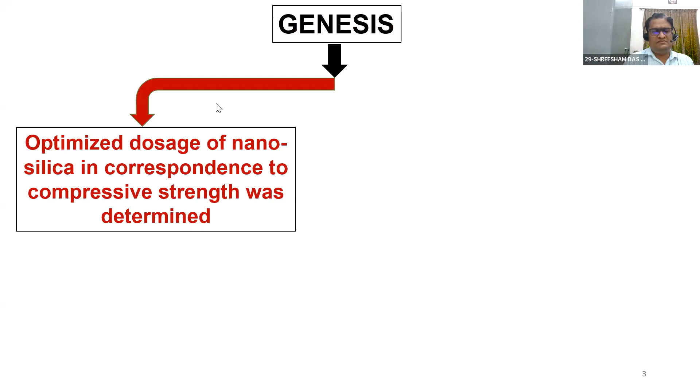And so what is the genesis? The genesis is, you know, the concrete or cementitious system we are looking at at this point of time necessarily has to be a high performing material and a sustainable material. So with this point of view, first we have optimized a nano silica blended cementitious composite that is, you can say, a high performing material as well as a sustainable material.

But in addition to that, we have realized there is a scope to go into transforming the nanosilica admixed cementitious composite into a thermal efficient material. So that is the need of the hour. Particularly if you have experienced last summer, that is 2023 April, May, June, even some of North India is still having that effect. We have really felt the temperature has gone up significantly.

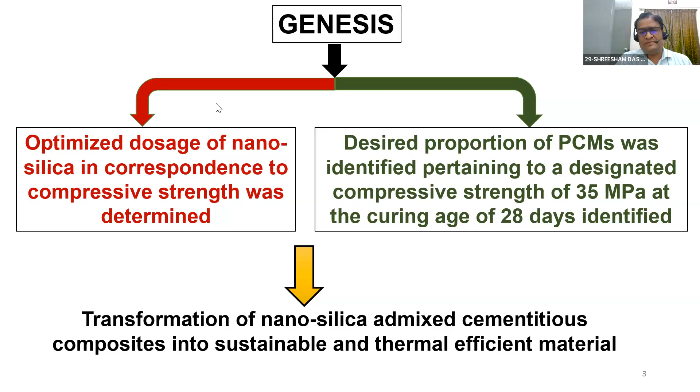So what we have to do now? Well, for all our building materials we are now completely dependent on concrete, the cementitious composites. So the problem here is the concrete or the cementitious composite is very poor performing with respect to thermal efficiency. So that is the reason it is necessary now to move into the development of a material where we can store the thermal energy and make the blended material a thermal efficient material.

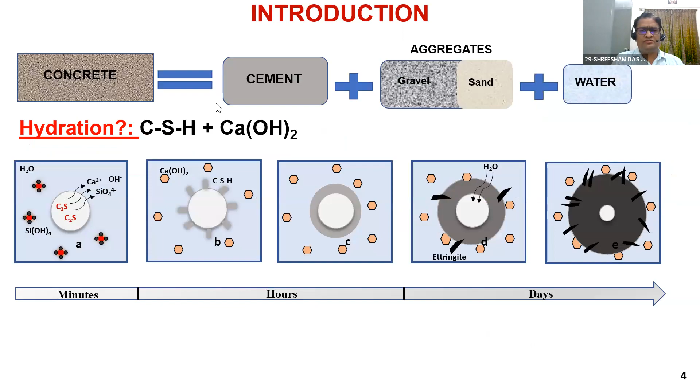So, well, I will go into this. In many of the presentations, many places, I have spoken about what the hydration process is for concrete. So I will skip it, because time is very short, since in many places I have spoken about what hydration is and how. Okay, like a bulk concrete.

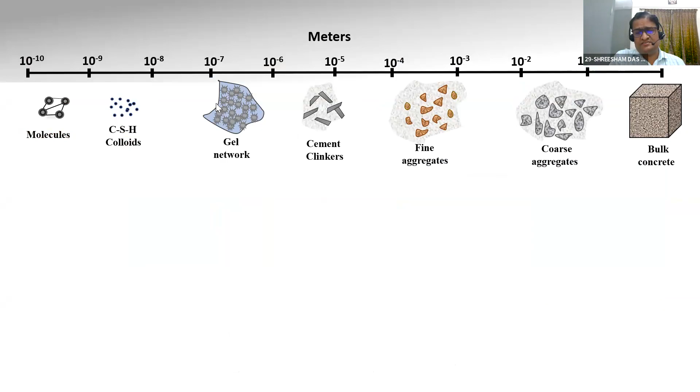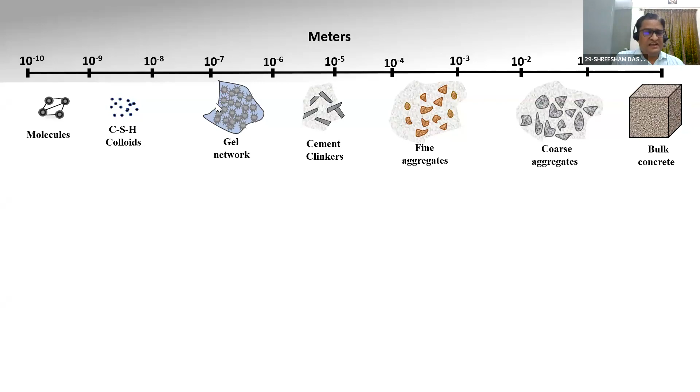Now in this slide you can see the bulk concrete, which is in 10 to the power minus 0, that is a meter scale specimen. We are anticipating the performance in this kind of size specimen, whether it is a beam or a column or a foundation or a slab, whatever it is. But the chemistry lies completely to the left side, that is the CSH colloids, the gel networks, the molecules. So that is the chemistry, and that defines the performance of the bulk concrete.

So, well, I will skip where we have spoken about the molecular dynamics. So this is nothing but the development of a nano engineered concrete, where it is necessary to go ahead with the addition of nanoparticles. So what is this slide with respect to the particle size of the material?

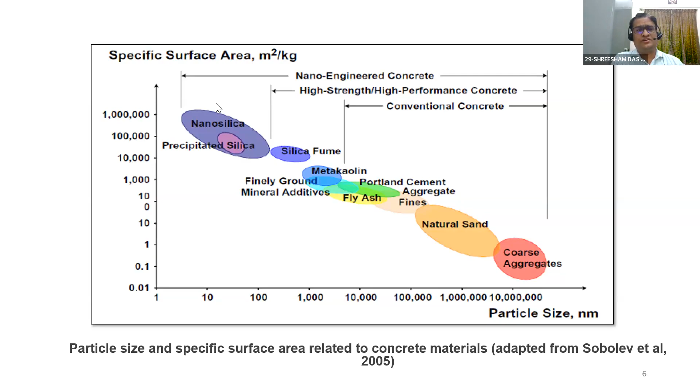The moment you keep on adding smaller and smaller sizes, you are able to produce conventional concrete, then high strength or high performance concrete, and then nano engineered concrete. So what is a nano engineered concrete? Well, it is nothing but nano ingredients with at least one dimension of nanometer in size. That is nano science, or you can say nano engineered concrete, with respect to concrete science. So there are a lot of advantages.

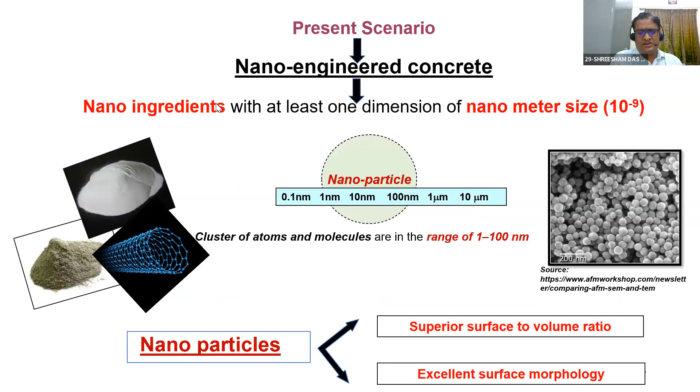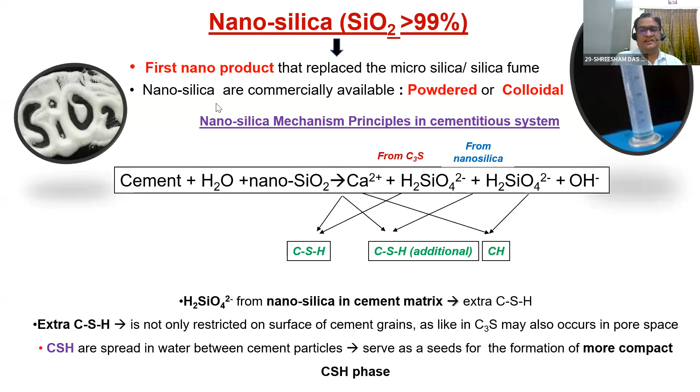In addition to that, nanoparticles are also a highly pozzolanic material. So because of the high pozzolanicity of the system, we get extra calcium silicate hydrates. And that is the way we get very compact and dense hydrated products. And that gives me a long lasting material, or you can say a durable material. So this I will just skip. This is all molecular dynamics.

But what is the challenge here? The challenge is when you deal with nanoscale material, it accelerates the hydration rates and reduces the workability. Smaller particles such as nanosilica also produce shrinkage, that is a large number of microcracks, and accelerated heat of hydration is governed by the curing. So you have to have very good quality control practices. That is necessary when you deal with smaller and smaller size particles. Otherwise, it is going to give you a problem.

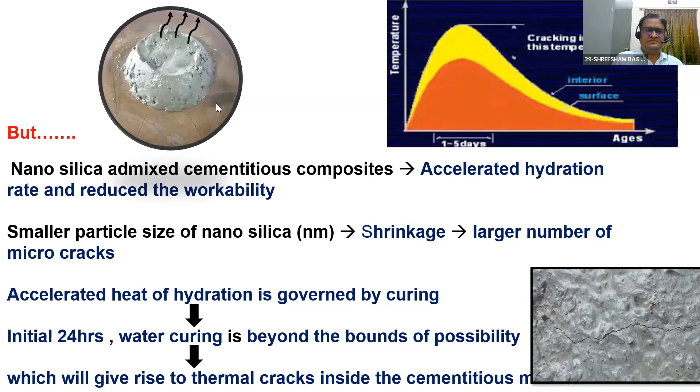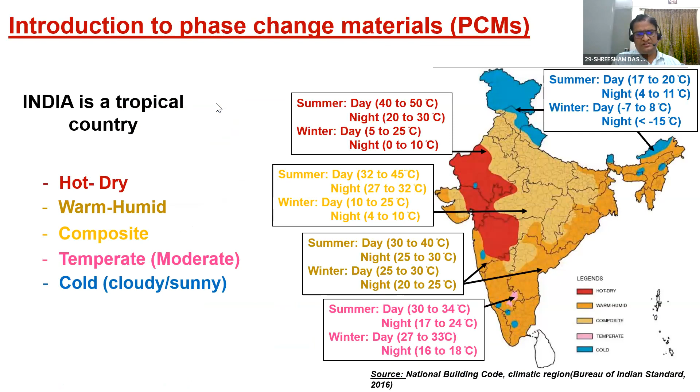So you can see that is what is happening. The moment you lose water, there is no chance except the formation of shrinkage cracks. So India is a very tropical country. We have very challenging climatic conditions. As per the Indian code of practice, we have 5 kinds of climatic zones: hot and dry, warm and humid, composite, moderate, and cold. So 5 climatic conditions, and the variation of the temperature is quite large.

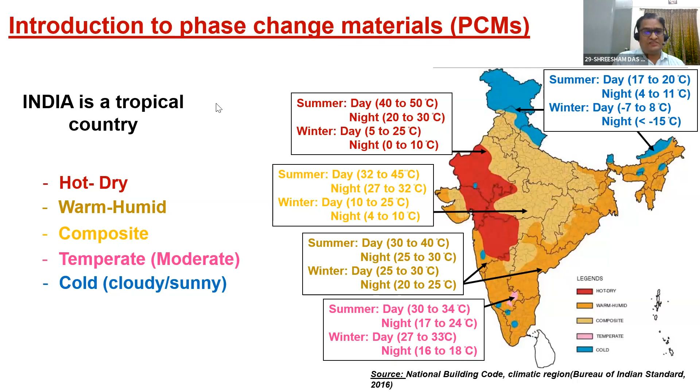In the south particularly, we are having intense rain now; if you go to the north, the rain has still to start. So we have a variety of climates across the country. Now, what are the challenges? The challenge is the summer and the winter. The variation between summer and winter for a few climates is too much. Like in hot and dry climates, summer temperature goes up to 45, 46, sometimes 50 degrees centigrade, and winter temperature comes down to even 0 degrees at night. So that is the variation from summer to winter.

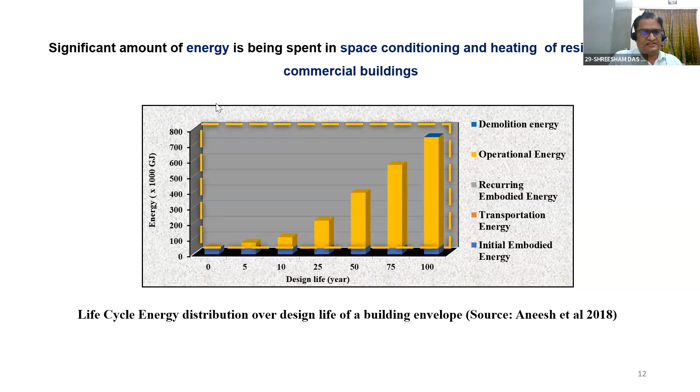So we have done a life cycle energy distribution over the design life of a building envelope, considering a variety of envelopes. We realized the operational energy is the largest consumption of energy in the life cycle of the building. You are spending almost 90 to 95% of the energy in its life cycle as operational energy. So what is the need at this point of time? Well, the need is energy efficient materials. Can we by any means increase the energy efficiency of the materials so that the thermal load can be cut down? That is the best way to conserve energy.

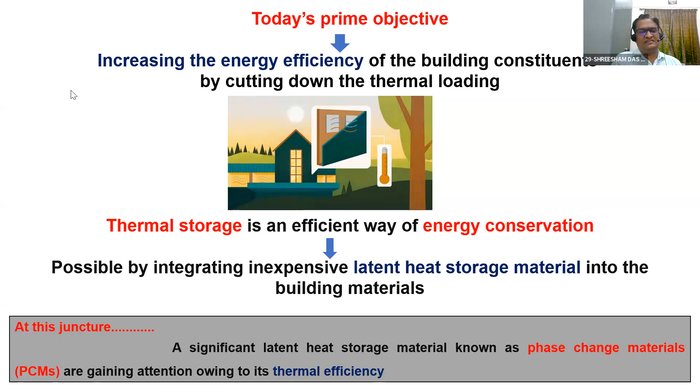So how is it possible? Well, there is a method: integrating inexpensive latent heat storage material into the building materials. At this point of time, latent heat storage materials, known as phase change materials, are gaining a lot of attention owing to their thermal efficiency. So you have to integrate the phase change materials, that is your latent heat storage materials, into the building materials. And that is the way you can make the system more efficient in conserving energy.

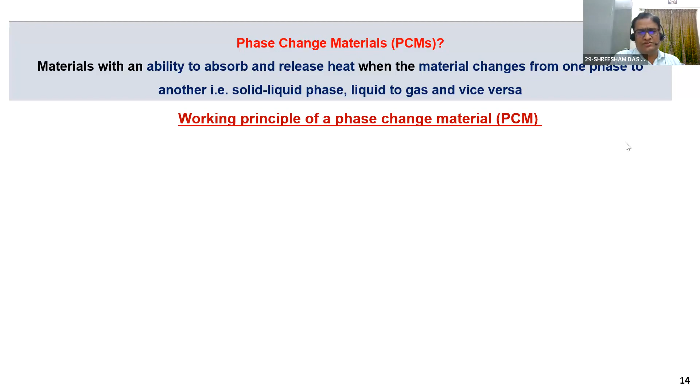So what are phase change materials? Phase change materials are nothing but materials with an ability to absorb and release heat when the material changes from one phase to another, that is solid to liquid phase, liquid to gas, and vice versa.

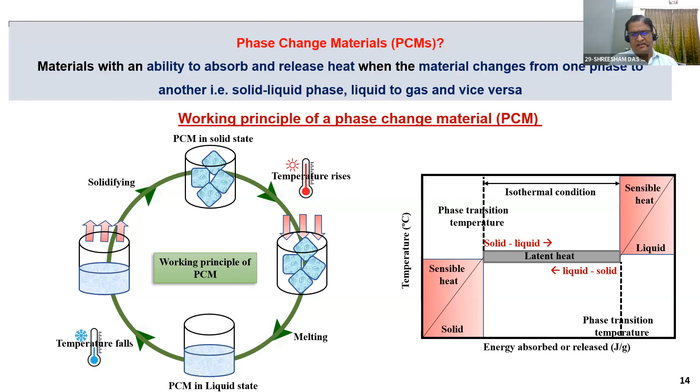So when you integrate the phase change material in concrete particularly, in hot day time, PCM absorbs surplus heat by getting melted, and that is the way it minimizes the load of air conditioning. The principle of heat absorbance is that a liquid takes a lot of time to get heated. The moment the PCM absorbs the heat, it converts into the liquid form, and thereby it will not allow the heat inside the building. So it absorbs all the heating load, and that is the way your air conditioning load is minimized.

Similarly, in the cold day time, or for example in the night if the diurnal variation is too much, the PCM becomes solid and the stored heat is released back. So in a cold day time, you need not switch on the heater, because it will not allow the outside cooling into the building, because this is going to be solidified. So that is the way it will minimize the load of heating.

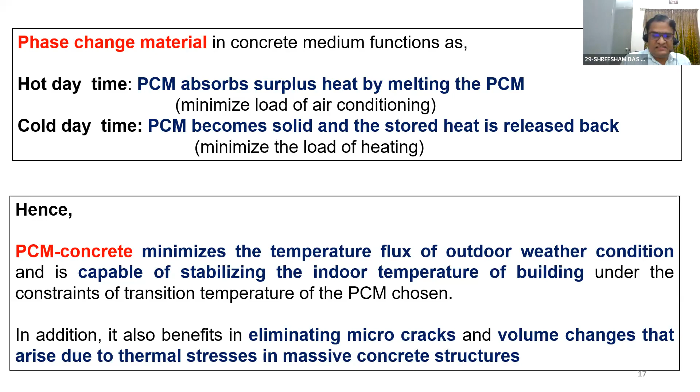Hence the PCM concrete minimizes the temperature flux of outdoor weather conditions and is capable of stabilizing the indoor temperature of the building under the constraints of the transition temperature of the PCM you choose. In addition, we have realized it also benefits in eliminating the micro cracks and volume changes that arise due to thermal stresses in massive concrete structures. We have not worked on massive concrete structures, but we have checked the shrinkage properties, and yes, it eliminates a significant amount of the shrinkage.

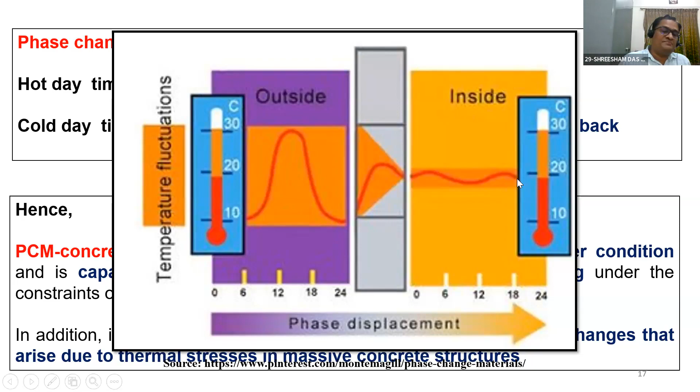So this picture says that even though outside the variation is too much with time, inside, if you have a PCM integrated wall, or a thermally insulated wall, you can maintain a uniform room temperature inside your building.

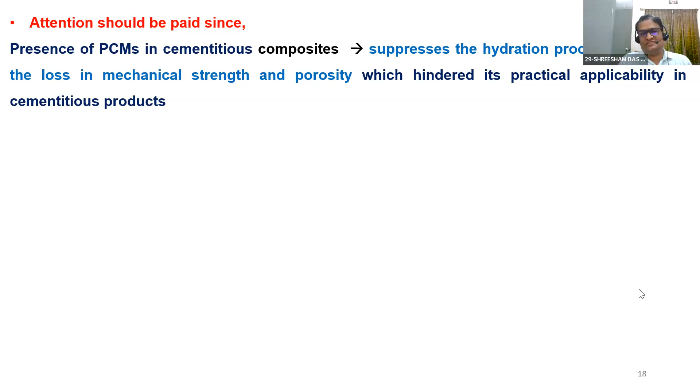What we realized at this point is that the presence of PCM in cementitious composite suppresses the hydration process, increases the loss in mechanical strength and porosity, which hindered its practical applicability in cementitious products. So the challenge here is the moment you add phase change material, your hydration is going to be hindered. If your hydration doesn't happen, definitely there will be loss in compressive strength and increase in the porosity. That is what we don't want. So that is the reason for what we have done.

We have integrated phase change materials into the nano silica based cementitious composites, using PCM as a latent heat storage material. The nanoparticles normally give a high heat of hydration and also shrinkage and associated thermal cracks, but a PCM based material is just the reverse, meaning hydration is slow, like low heat of hydration. It's opposite actually, and it minimizes shrinkage and thermal cracks.

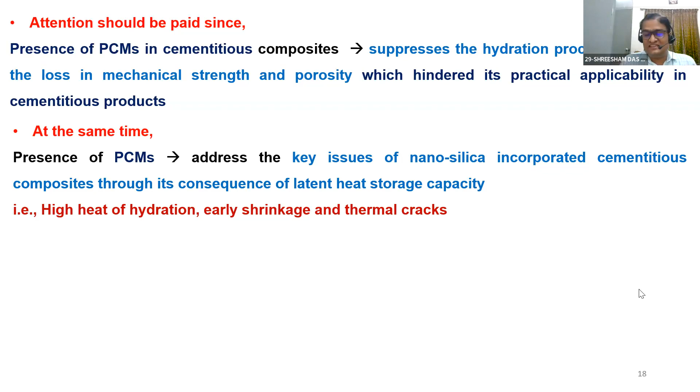So if you add both, they will balance each other's deficiency, and we can take both of their advantages. The drawbacks of nanosilica based cementitious composite can be mitigated by combining it with PCM based cementitious composites. Thus you can produce a thermally efficient, sustainable and high performing construction material.

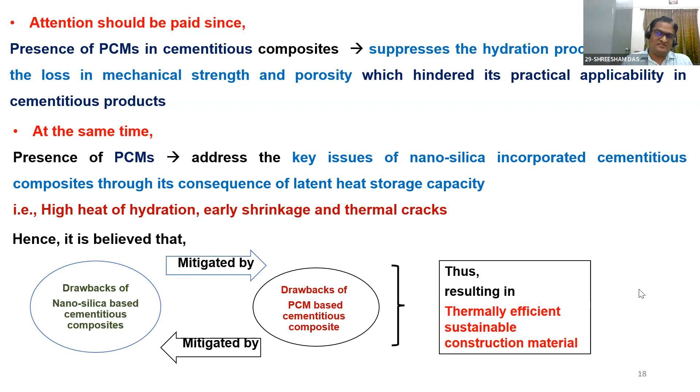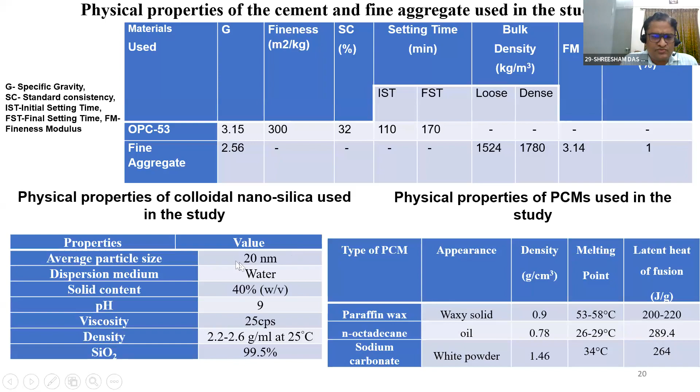This is the way we've used the cemented system, and you can see here the nanoparticles. We used 20 nanometer size particles in colloidal form, just to avoid any kind of safety hazards. This is the particle size of the OPC, sand, and nanosilica.

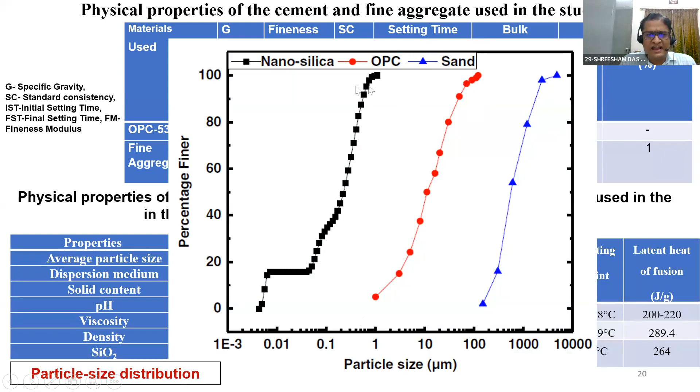You can see my OPC stands in the micrometer zone, my sand lies in the millimeter zone, and nanoparticles lie in the nanometer zone.

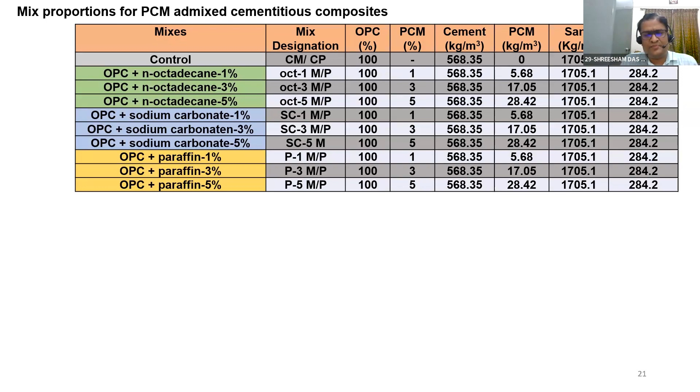So we tried different proportions, and similarly in the next stage what we did was OPC plus nanosilica 3%, then OPC plus N-octadecane 1%, then OPC. So what I've done, I will tell you.

We have taken all these initial mixes, and from this we have chosen only the best performing mixes. First we checked that the phase change material doesn't hinder too much of the hydration process. If it hinders too much, then it is not good for me.

So out of all these three, N-octadecane, sodium carbonate, and paraffin, we realized only N-octadecane is performing the best. Meaning for my requirement, N-octadecane is the only one working well with my material.

So in the second stage, I reduced my mixes to only N-octadecane: OPC plus N-octadecane 1%, OPC plus N-octadecane 3%, OPC plus 5%, which I had already done. For all these three mixes, I added 3% of nanosilica.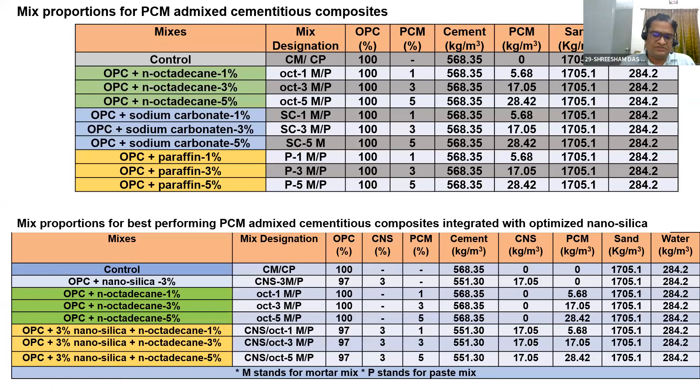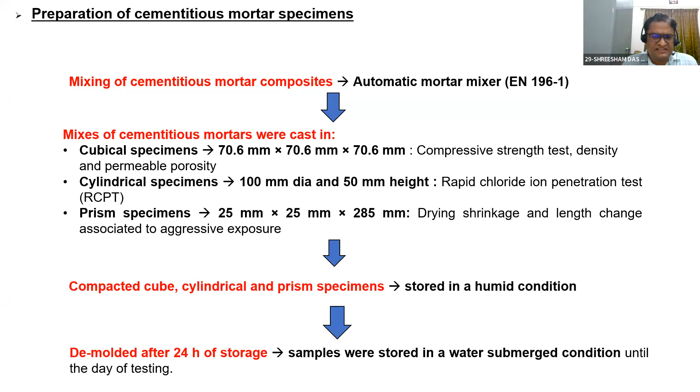All the specimens were mixed and cast following standard testing methods: cubical specimens, then cylindrical specimens for the RCPT test, then prism specimens for the drying shrinkage. These are the standards for compressive strength, drying shrinkage, and RCPT. By following these standards, the tests were made.

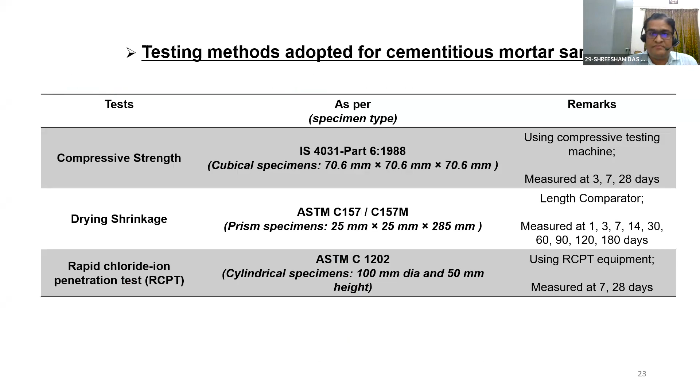I will just skip this. So what we did was two types of mix. One is for mortar, for all kinds of compressive strength test, shrinkage test, and RCPT test.

But for advanced characteristic studies, like checking the hydration phenomena, checking the mineralogical phenomena, checking the thermal properties via differential scanning calorimetry test, we took paste specimens in the same proportion, but for the paste.

For the paste, you can see on the right side this is a silicon mold normally used for preparing chocolates. We prepared small size specimens with diameter 2.1, lower diameter 1.9, and height 2. These are the sizes.

We cast small specimens following all the standard procedures of casting, and then after certain days, that is 7 days and 28 days, they were subjected to advanced characterization studies.

Okay, that is pozzolanic reactivity test, but I will skip this one. It is already published.

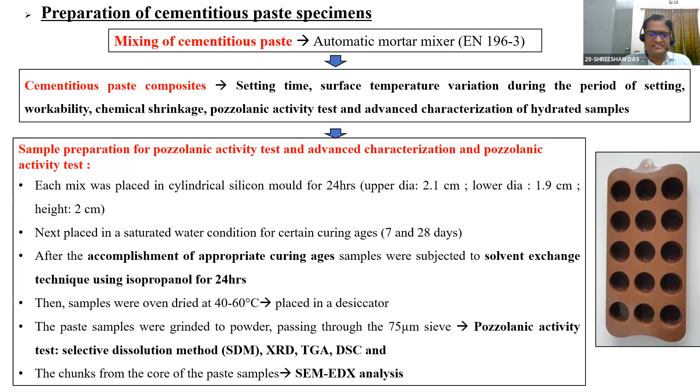XRD, TGA, and DSC. I will speak more about today TGA and DSC, mostly DSC actually, because this talk is towards the thermal efficiency. Also, we have done the SEM EDX analysis. So this is the way the paste was characterized. First we characterize the paste, and then we did the advanced characterization.

So as I was talking about how we have realized it is stopping the hydration, well that is through the thermogravimetric analysis, that is TGA. If you do a TGA of a cementitious composite, you can understand how the hydration phenomena happens. As you know, we have two compounds, calcium silicate hydrates and calcium hydroxide. So if you can measure or determine the CH, that is calcium hydroxide, and the CSH, you can tell how the hydration phenomena is happening.

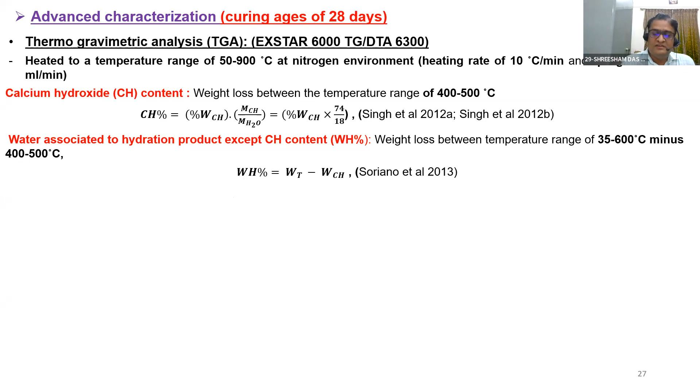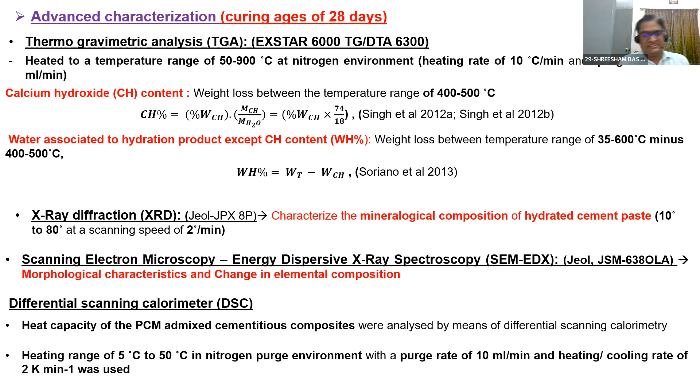Similarly, XRD was done through X-ray diffractometer, then scanning electron microscopy and energy dispersive X-ray spectroscopy also was carried out. Then the important measure for this talk is the differential scanning calorimeter. I will speak more about this. So we have taken the specimens and did a differential scanning calorimetry to understand how much energy it can store, meaning how much heat energy my material can store. That is very important actually.

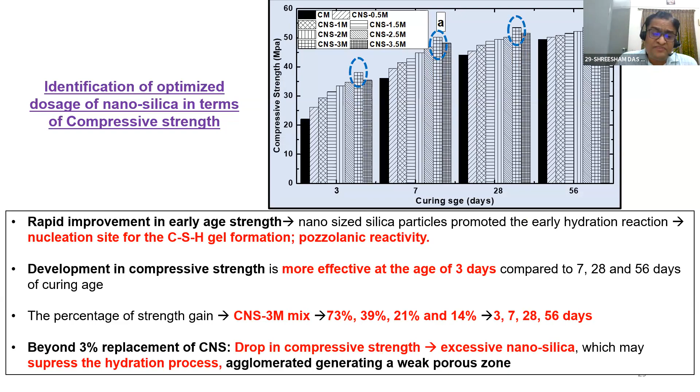So thermomechanical performance of Nano SiO2 and PCM based cementitious mortar. This is my compressive strength. I have spoken about this in many of the presentations, you can see some recordings on YouTube or some papers, so I will skip this. The moment you add nanoparticles, I am getting a tremendous increase in the compressive strength, and that too at the age of 3 days itself. So that is the advantage of adding a very small percentage of nanoparticles.

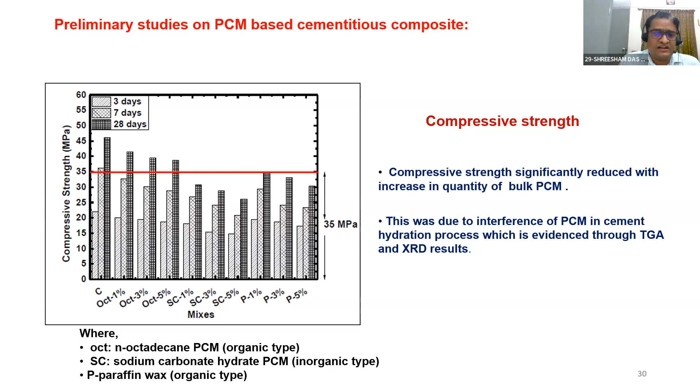So what we have done, when we have gone with the phase change material admixed material into the cementitious composite, we have realized I have to go ahead with a phase change material which gives me at least 35 MPa compressive strength, otherwise I cannot go forward. So 35 MPa was chosen as a benchmark. Except N octadecane, all other materials, sodium carbonate and paraffin, failed to achieve 35 megapascal. So further studies I have performed only with octadecane, nano octadecane, N octadecane material.

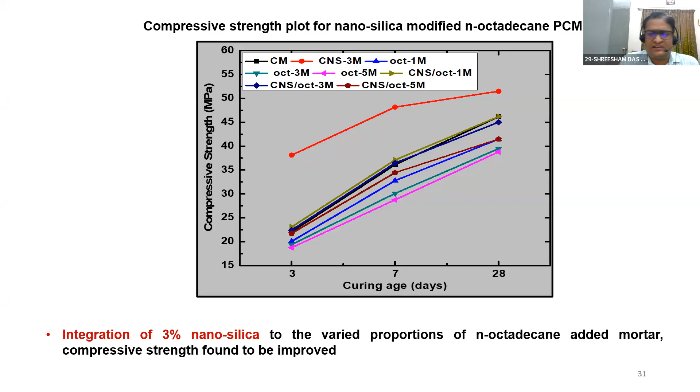Okay, so these are my integration of nanoparticles and how with time I'm getting the compressive strength. I will skip this one. And this is nothing but the shrinkage I was talking about. The moment you use a PCM admixed mortar, your shrinkage reduces substantially. That is the advantage when I'm using a PCM admixed cementitious mortar.

Now you can see the red one, that is CNS, it is giving me the maximum strain, because that is having 3% of nanosilica, and I was telling you the moment you add nanoparticles, that is going to give me the maximum shrinkage. Similarly, the green one, that is the 5% of N octadecane, and that is giving me the lowest shrinkage, because I am adding phase change material, and that is going to absorb the heat within the cement system that is available.

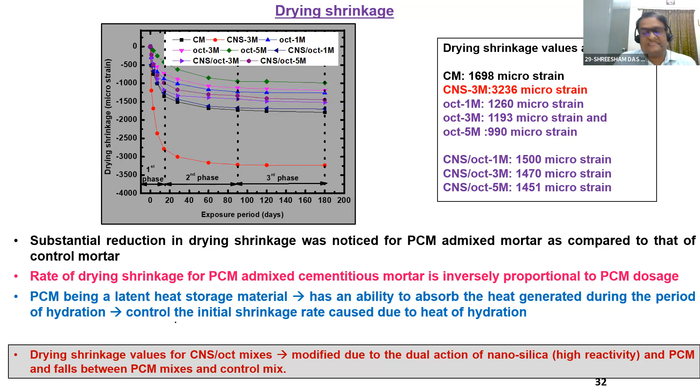So what you can see here? This black line is nothing but my cement paste. So when I am going ahead with the temperature, you can see it is going a flat line. There is no heat getting stored, because as I was telling you, OPC, a normal concrete, is very poor in heat absorbance. That's why they are conducting the heat.

But here now let us go into the N octadecane 1%, and this is 3%, and this is 5%. The moment I am increasing the dosage of PCM, the heat capacity, meaning heat absorbance capacity, is increasing.

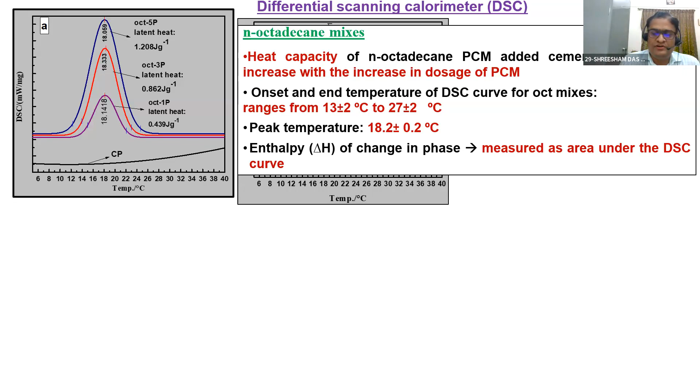Well, you can measure the enthalpy of phase change, measured as the area under the DSC curve. So this is my starting temperature, and this is my end temperature where I'm getting a major peak, meaning that is the point where heat is getting absorbed. So you can measure the enthalpy by calculating that area, and there are many software available which will give you the area if you upload these curves. So that is my only PCM based material.

Now the second one: the black line is the control mortar, just a straight line. The colloidal nanosilica 3% when added is also just a flat line — there is no much change in the peaks, meaning there is no capacity for heat absorbance. Now this red one is nothing but CNS 3% plus octadecane 5%. Octadecane is 5%, meaning it is giving me a peak, and it is absorbing heat.

Now what is the blue one? Blue one is only octadecane. So what is the temperature boundary for octadecane? It is around 18 plus or minus 0.2 degree. So when I add nanoparticles to octadecane, the phase change material, there is a shift in peak temperature to 20.3 plus or minus 0.2. So there is a small reduction in heat capacity, but yes, I'm getting a peak, and I am able to absorb a substantial amount of heat, or a substantial amount of heat can be stored.

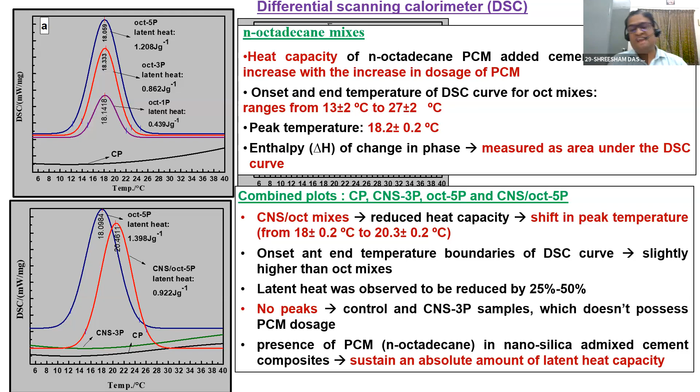So you have to choose: whether it is just a PCM based material, which gives low strength, or a nanoparticle admixed PCM based material, which gives sufficient compressive strength — that we civil engineers go mad about — as well as latent storage capacity.

So this is the same thing I told you. I am going ahead with CNS 3% plus 1% octadecane, this is 3%, 5%. If you compare both, my peak was very sharp, but the moment I add nanoparticles, the peak gets a little flattened. That means I'm losing a bit of heat storage capacity by going with nanoparticles, but simultaneously I'm making the material more stronger, more highly performing.

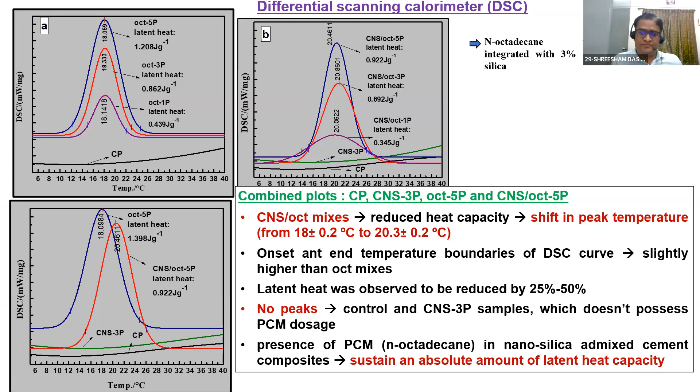So next is the TGA. I will quickly go ahead. This is not my TGA, this is my DTG, the derivative thermogravimetric curve. If you do the DTG, only then you get this kind of peaks. Normally, as you see in some of our papers on normal concrete, whatever is here also applies there. There will be one peak, that is calcium silicate hydrate, a second peak, that is calcium hydroxide, and third is my calcium carbonate.

So normally you get three peaks. But when you add PCM, now you can see how the dotted line is performing. One is my CSH, and in this boundary of temperature, that is 200 to 300 degrees centigrade, I'm getting one additional peak. And my CH is at almost similar temperature, even the CC also at similar temperature. So what we realized is that this peak is getting small, meaning the hydration in the initial days is slowed down, and it is pronounced in one additional temperature range.

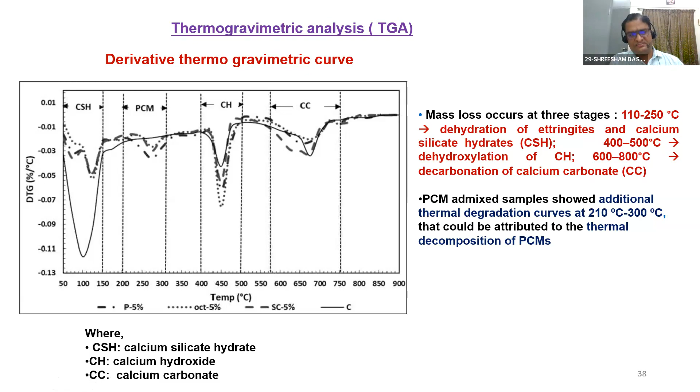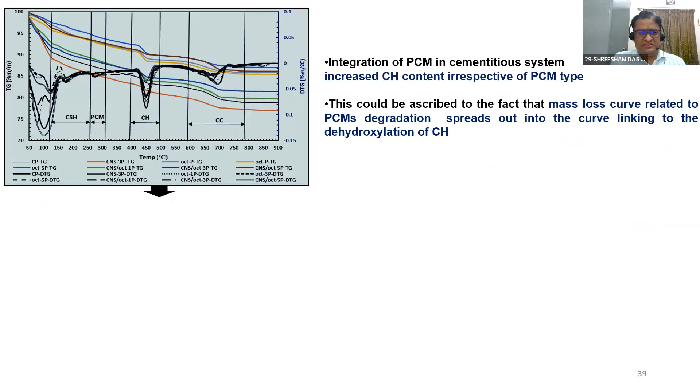And that is nothing but the thermal degradation curve for the PCMs, between 210 to 300 degrees centigrade. You can see some of our papers; this work is already published. So this is all about the integration of PCMs into the cementitious system. This TGA I have spoken about at many conferences, and there are many papers on it as well. So this I will skip.

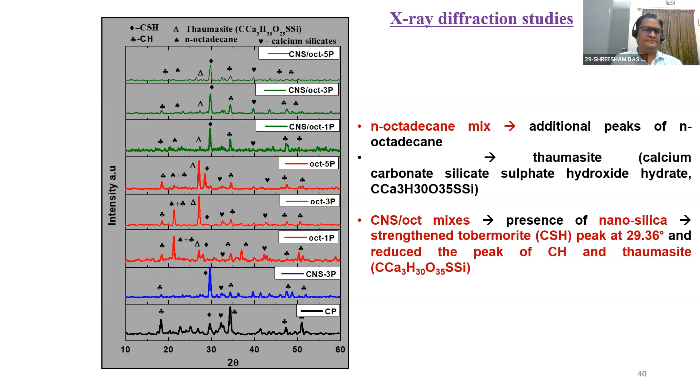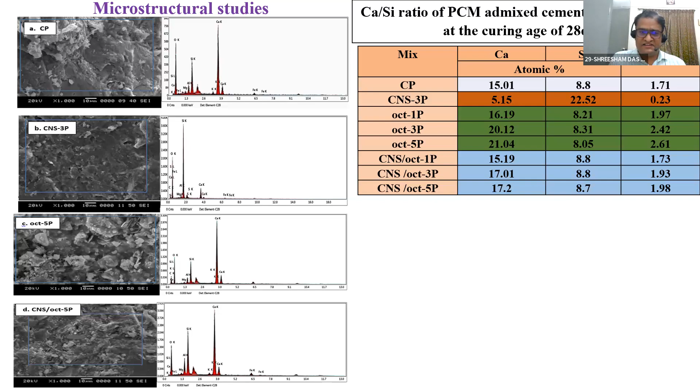So I am into the conclusion. The compressive strength is fine. With respect to thermal efficiency, the moment I add phase change material into the nanoparticle-admixed cementitious composite, I am achieving a parameter called thermal efficiency. And that, at this point of time, is the need of the hour.

The world is facing global climate change. Every one of us now needs air conditioners in the summer and heaters in the winter. By adopting this kind of material, you can avoid that to some extent. I'm not saying AC is 100% not required. But to some extent, your heating load is going to be reduced, and simultaneously your cooling load is also going to be reduced. That way you can save an enormous amount of energy, and that is one of the objectives of this conference. We have to understand global sustainability, and by adopting this kind of material, we can achieve sustainability.

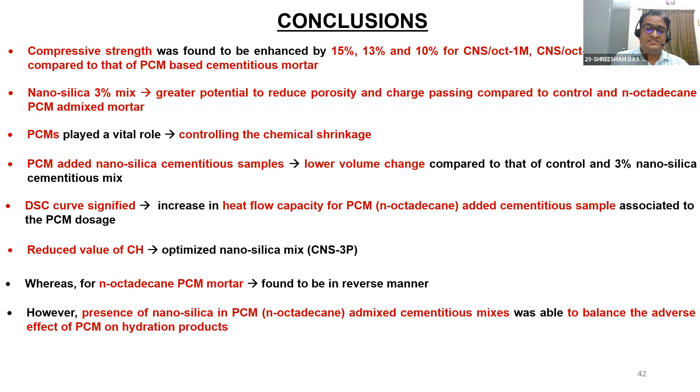So if you avoid the curing, definitely you will have formation of micro cracks, and those micro cracks will later lead to durability issues. So your material that you designed for 50 or 100 years will last only 20 or 25 years. This is the problem. What we have realized is, when we add nanoparticles, even a very small percentage, in some of our research only 2%, we got very good performance. But in the field, nobody will adopt strict quality control.

So what we can do is mix two or three materials. One material is this phase change material. One requirement was to develop a thermal efficient material, and we realized that if we add PCM, phase change materials, we can develop one. But there is a deficiency in the hydration process, because they are blocking the hydration. They are not allowing hydration to happen, so the compressive strength reduces.

I think I have answered your question? Yes sir, and it is true that quality control issues are persistent in our industry right now. We have specific publications. I will send you them, because here we have not much studied shrinkage, but when we developed specific nanoparticle based materials, we did extensive research on shrinkage, and it is published in very good journals. I can send you how to characterize this shrinkage and then work forward.